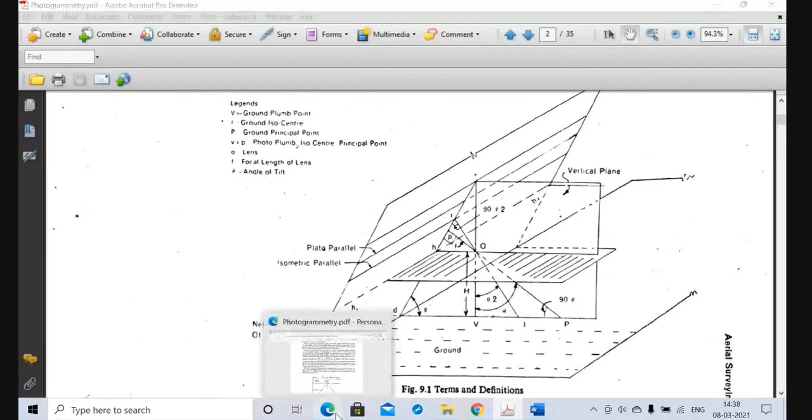The question I ask before every surveying class is: what is your concept about surveying? What is surveying? Prepare an engineering map. Anything else? You are already familiar with conventional methods of surveying, that is chain compass survey, theodolite survey, all already taught to you, right? Sir, surveying is the way to determine objects on a map for making the structure. Okay.

I think your batch has not been able to perform any practical class, right? No, sir. Surveying is purely a practical subject. You have to perform the thing on the field. So unless and until you do so, it will be impossible to grasp the potential and the true nature of the subject. However, all of us are facing these limitations.

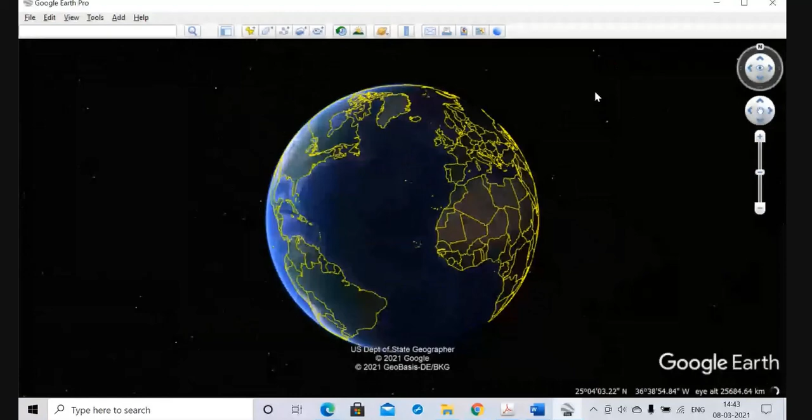So to draw anything on space, say a line. What is this boundary of India constituted of on the map? Of course, a line or combination of lines. And to draw any line, what do we require? Length of the line. The coordinates of the line. Coordinates of the line, what does it mean? Call it a point. Which points we connect to draw a line.

Could you see the map of India on your screen, the Google Earth map? Yes, sir. Fine. These yellow lines are constituted by joining several straight or curved lines. To draw any line, we need to ascertain the points constituting the line. So basically, we are scaling down our whole discussion to ascertaining the position of points on some spatial coordinates. Right? That is the basic principle of surveying.

Somebody has mentioned that for preparing maps, relative positions of different points on different planes are required. Of course, it is required. And whatever surveying you have learned so far, the conventional methods like chain compass, theodolite, leveling, in all of these you have basically learned how to ascertain, measure, and represent relative positions of different points on a particular plane.

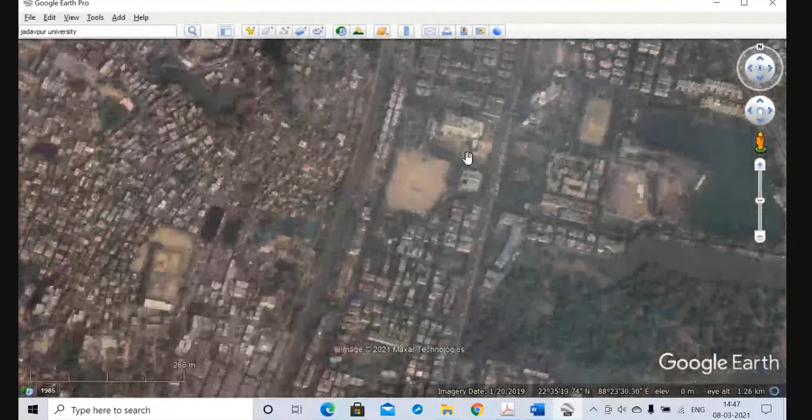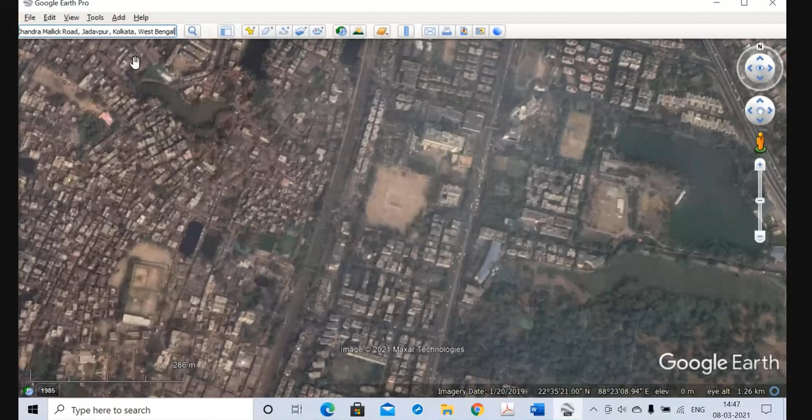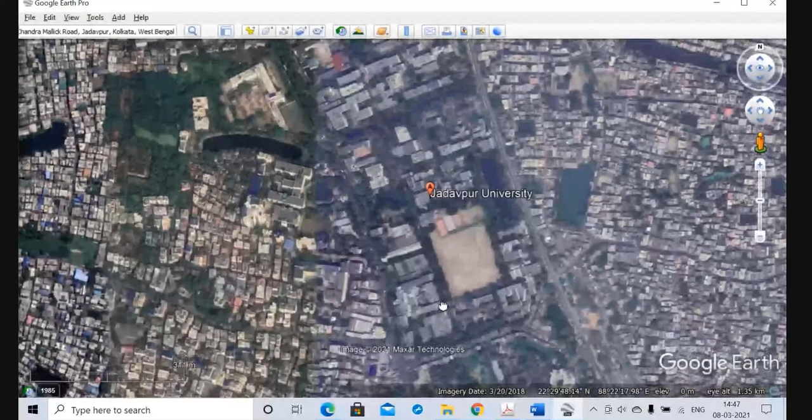the entire map of the entire area, just a second. So the map of the entire area is now visible, and this particular building is our very own Projukti Bhavan, hosting the civil engineering department.

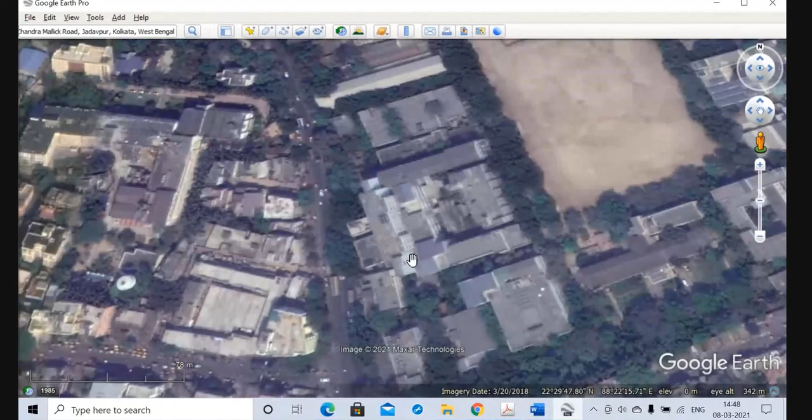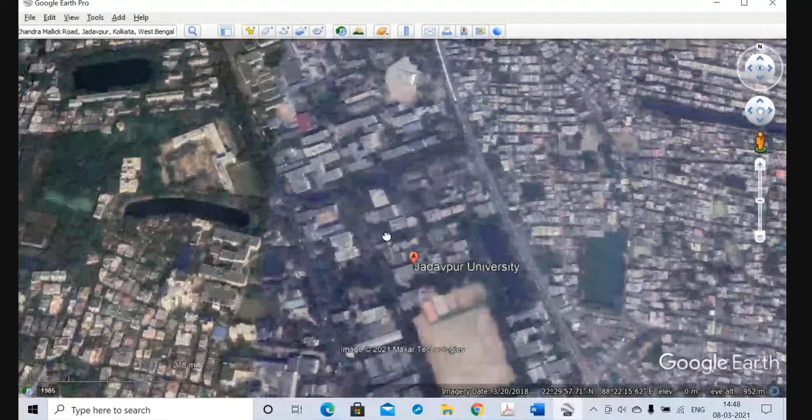So we could take all kinds of measurements here itself and see in a top view how the entire area looks like. It does not require any of the conventional methods to prepare this particular image. This particular image is made up of combining several images taken from satellites.

So our surveying work, with the advancement of technology, has now come to this extent. Of course, we are not going to study here the satellite imagery. Perhaps GNV sir is going to teach you the remote sensing and GIS part. What I am going to teach you here is the science of this photographic survey.

That means when the surveying work is carried out by taking photographs of an area either from ground or from air. So our area of study will be photographic survey or aerial survey. Mind it, this satellite imagery definitely is a part of, a more advanced part of this photographic survey.

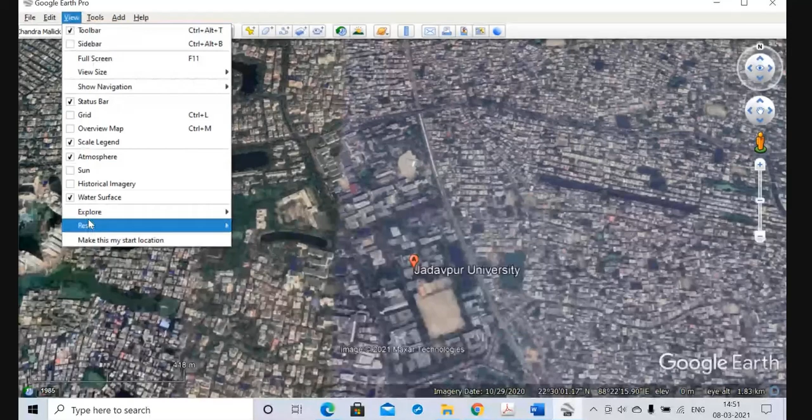After adjusting the tilt of the photograph, the kind of photograph we are seeing here is a vertical photograph. What is a vertical photograph? When the plane of the photograph or plane of the sensor of the camera is exactly parallel to the plane of the surface for which we are taking the photograph. So this is a vertical photograph. There could be other kind of photographs also.

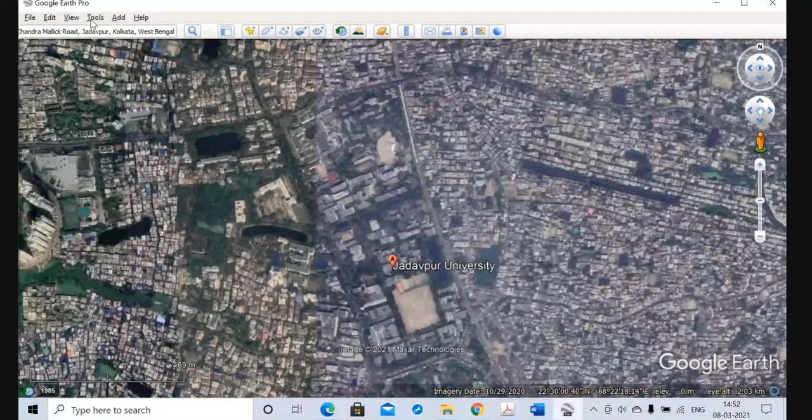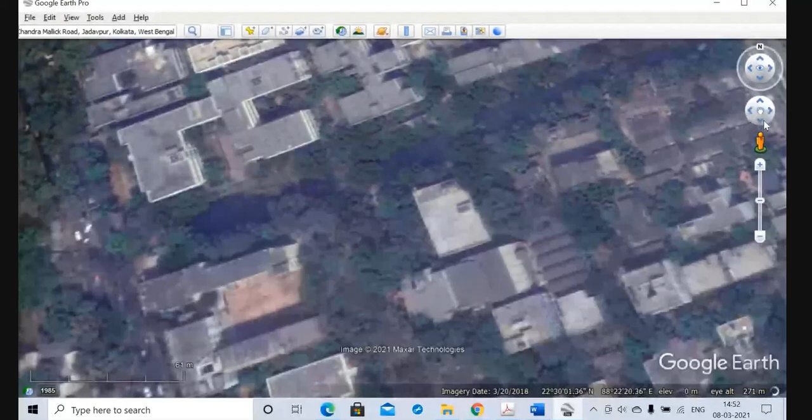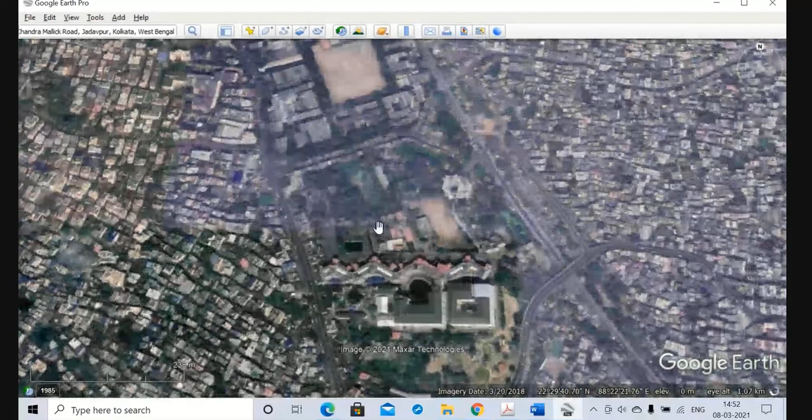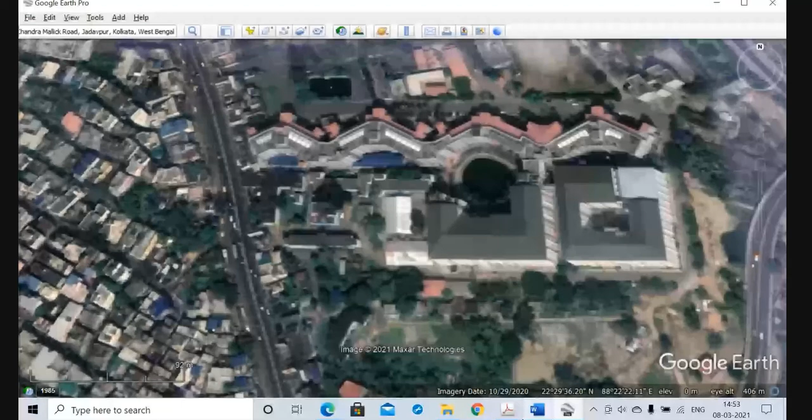Just a second. As you can see here, walls of these buildings are visible, right? Had it been a purely vertical photograph, we could have only seen the rooftops or the footprints. So the photographs we are seeing here might not be purely vertical ones. This kind of photographs are called oblique photographs.

I am taking two images and sending them to your WhatsApp group. Just see it. This is my tabletop. Just a second. Could you see the photograph sent to your WhatsApp group? Yes, sir. You have to keep your WhatsApp on.

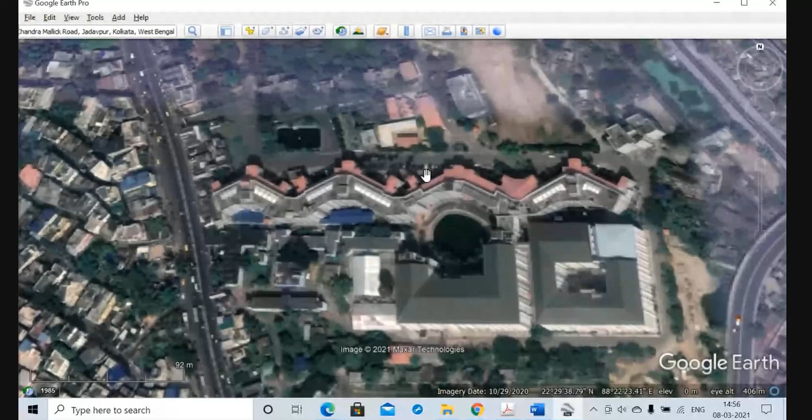Depending on the inclination, the oblique photograph again could be of two kinds. If we just simply imagine, all these photographs that are visible on the screen are called low oblique photographs. These are called low oblique photographs when the horizon is not visible. I am taking a third photo of the same pen.

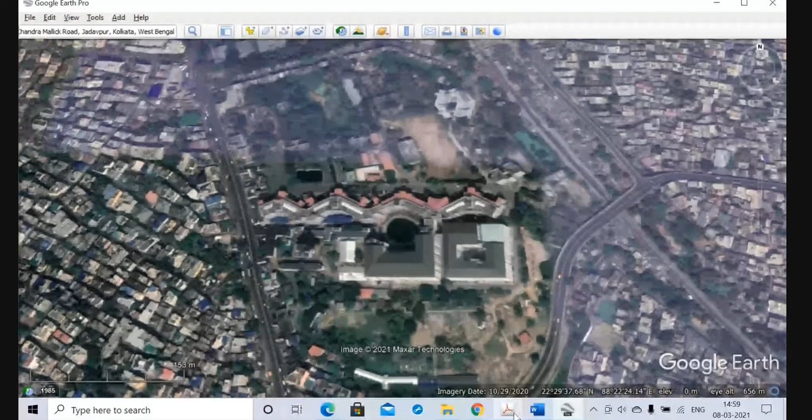In our course of study, basically we are going to study two kinds of photographs. That is either vertical one, the very first one, or the low oblique photographs with less inclination. Okay. So, with this brief introduction, let us get acquainted with a few terminologies.

Unfortunately, the blackboard is not available. So this is my limitation here. Limitation to you also. So you have to imagine a bit.

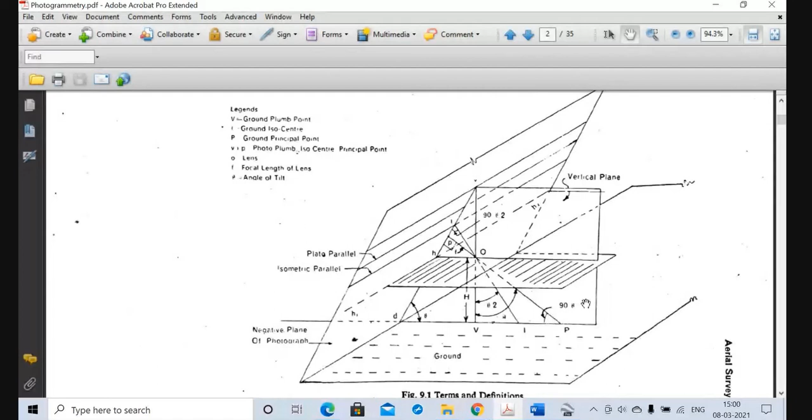This is the representation of an oblique photograph. Let us try what is what. As you can see, this dotted plane is the horizontal plane. Let us consider it as ground. The inclined plane, this one, is the plane of the photographic plate.

Is the figure clear up to this? Yes. This plane is, just follow the cursor. This plane is horizontal plane, and this is the inclined plane of the photographic plate. When extended, these two planes are meeting at this particular line. And as you can see, the plane of the photographic plate is inclined to the ground plane by an angle theta.

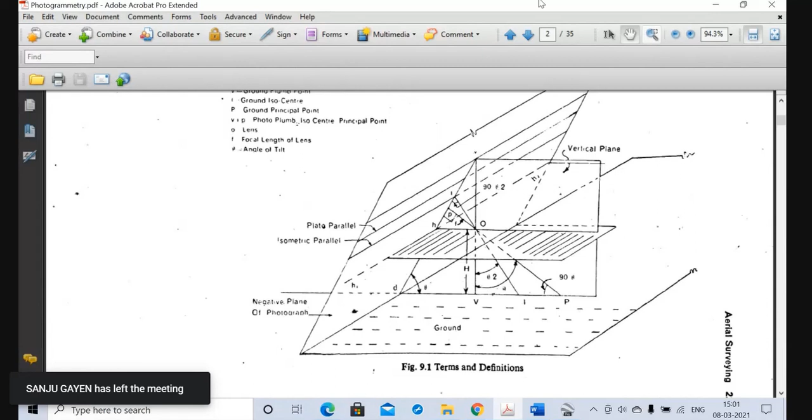Now, there is a point in this three-dimensional space enclosed between this ground plane and the inclined photographic plate, denoted as point O. This point O represents the optical center of the camera lens with which the photograph is being taken. Is it clear up to this point? Yes, sir. The construction of the figure is very important. You have to understand it.

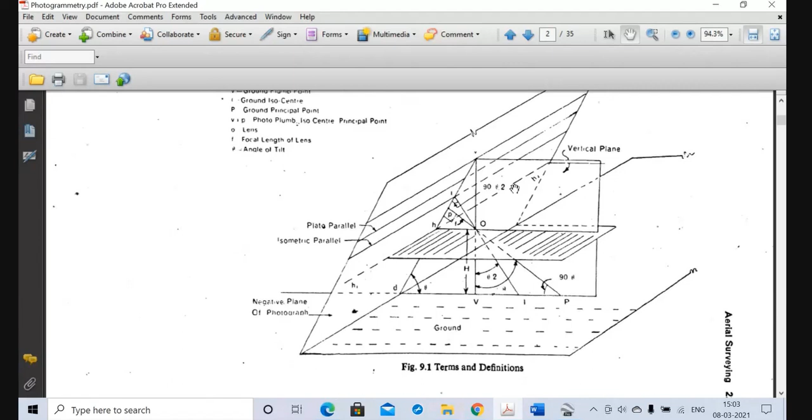Okay. Now, we have drawn another plane parallel to the ground plane. This is the ground plane. We have drawn another plane parallel to the ground plane, passing through point O, which intersects the photographic plate at a line H1 H2. This is H1, this is H2. Is it clear up to this point? Sir, can you repeat once? Yes. Okay. I'm just opening the camera.

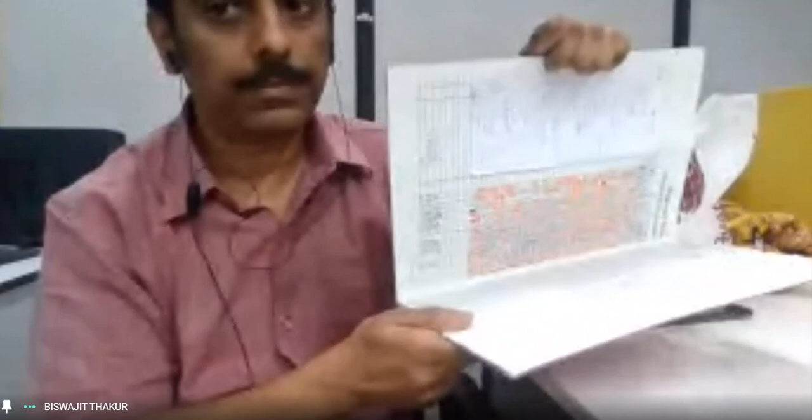Could all of you see this attendance register I am holding? Yes, sir. Imagine this particular plane as the ground plane, and this inclined plane as the photographic plane. Okay? Okay, sir. Fine. Just see the position of my fingertip. Somewhere here is the optical center of the lens.

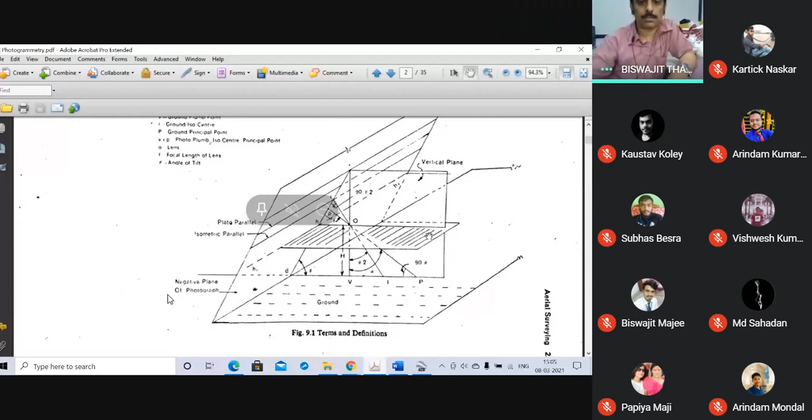Through it, I am drawing a plane parallel to the ground plane. So that plane is going to intersect this photographic plate at a line. This is H1 H2. So this is clear. Let us draw a straight line right through point O, that is the optical center of the lens, which is perpendicular to the photographic plate. I am talking about this particular line, OP. OP is going through point O, and it is perpendicular to this inclined plate.

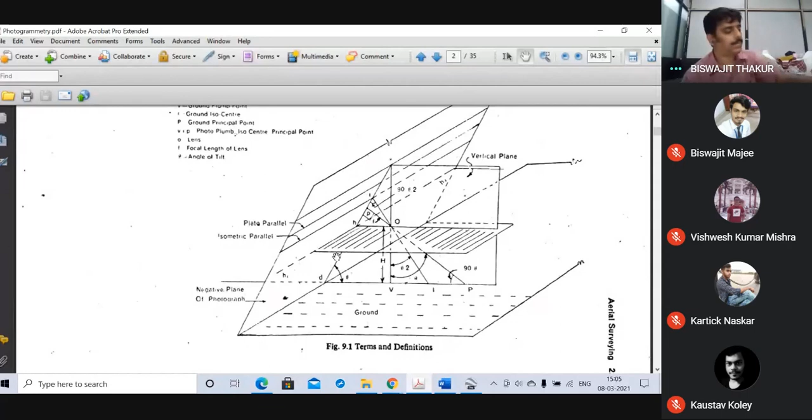Again, just see the camera. This line, the pen. It is OP, perpendicular to this photographic plane. Sir, can you hold the camera a bit low? It is high. Now visible? Yes, sir. My fingertip is point O. The pen is passing through that point and is perpendicular to this inclined plane. Okay? This line is called the photo principal line.

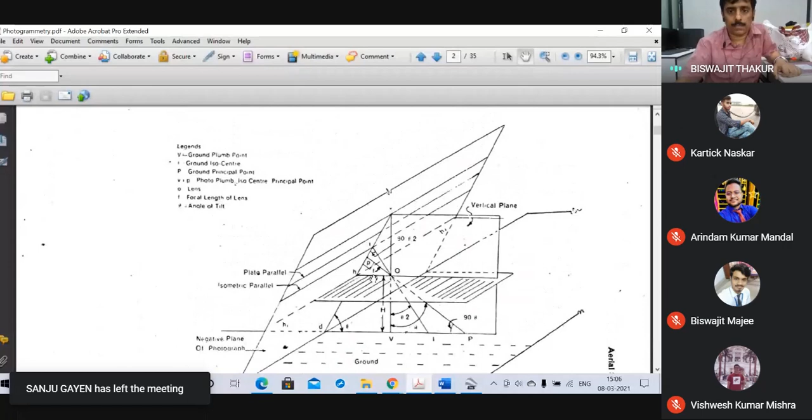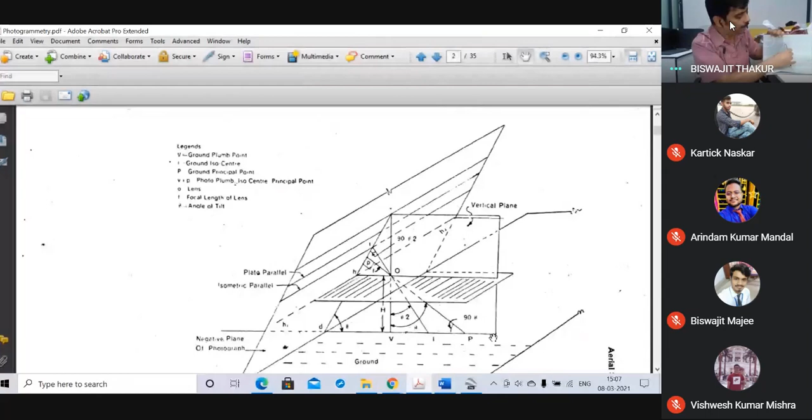This line is called the photo principal line, and it is cutting the photographic plate at a point denoted by small letter p, and when extended, it is cutting the ground at a point denoted by capital letter P. Again, just think of something like this. Could you see the pen? Yes, sir. This is optical center O. This is our photo principal line. That line is cutting the photographic plate here and the ground plane here.

These two points are called principal points of the photograph. On ground, it is called ground principal point. On photograph, it is called photo principal point. And together they are called conjugate principal points. We will learn about several such conjugate points. Generally, the points on the ground plane are denoted by capital letters, and corresponding points on the photographic plate are denoted by small letters. So now we know this is the photo principal point, small letter p, and this is the ground principal point.

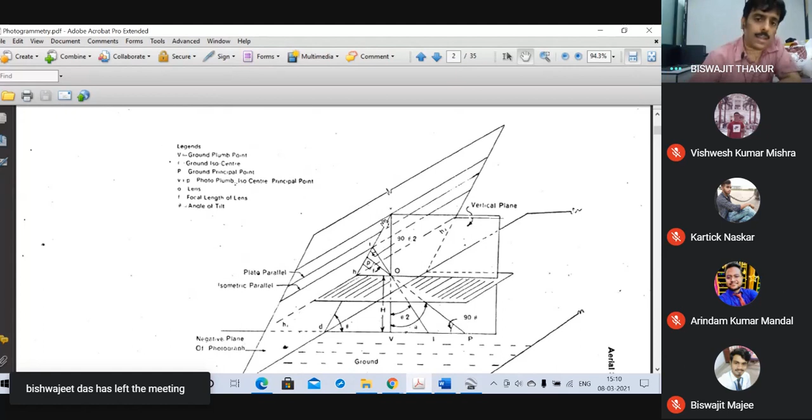This particular line is called the plumb line of the photograph. And again, it is cutting the photographic plate at small letter v point and the ground plane at capital letter V point. This line is called the plumb line, and these 2 points are called the plumb points. Of course, the small letter v point is called the photo plumb point, and the capital letter V is called the ground plumb point.

Up to this, is it understood? Is it clear? Yes, sir. Yes, sir.

Now I am on the third pair of conjugate points, which is very, very important. As you can see, the principal line and the plumb line again are inclined to one another, making an angle theta in between them. The same angle of inclination. I need not explain this. Angle of inclination of this plate with the horizontal will be same as the angle of inclination of the line to the photographic plate with the vertical one. So if this angle is theta, then this angle will also be theta. Understood?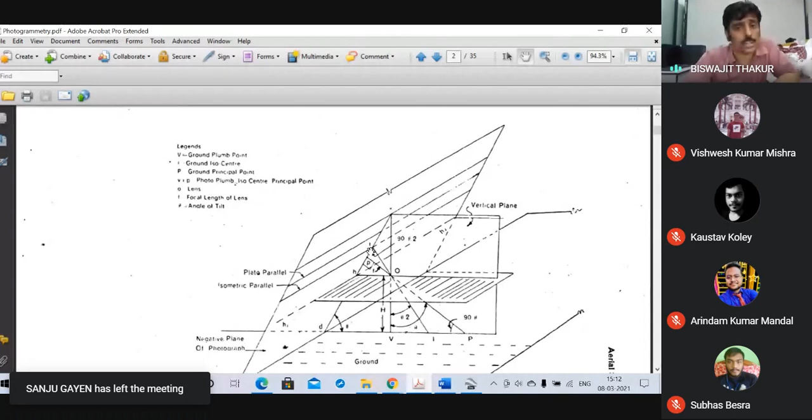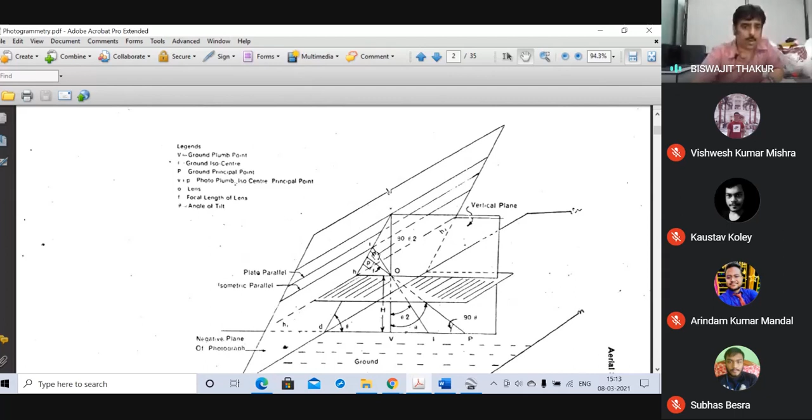Now I am drawing a line bisecting this angle theta through point O. This line is going to cut the plane of the photograph at this point, denoted as small letter i, and the ground point here, denoted as capital letter I. These 2 points are again a pair of conjugate points and are called isocenters. Of course, this point is called photo isocenter and this point is called ground isocenter.

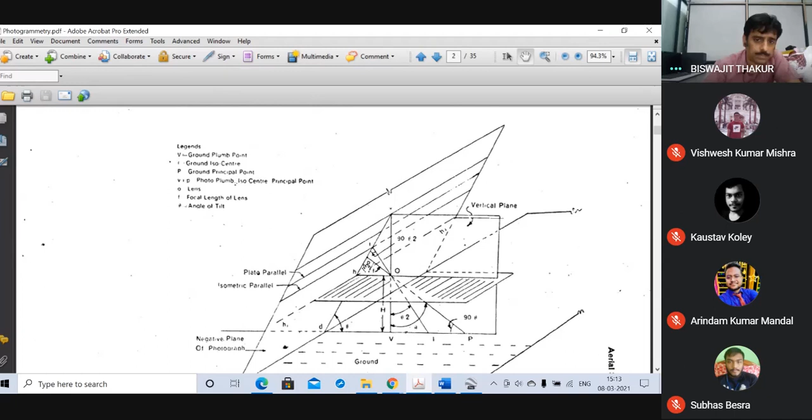What is the typicality of this particular point? As you can see from our simple trigonometric knowledge, just follow my cursor. If this angle is theta, then this angle is also theta. Isn't it? Yes, sir. If this angle is theta, then this angle is going to be 90 minus theta.

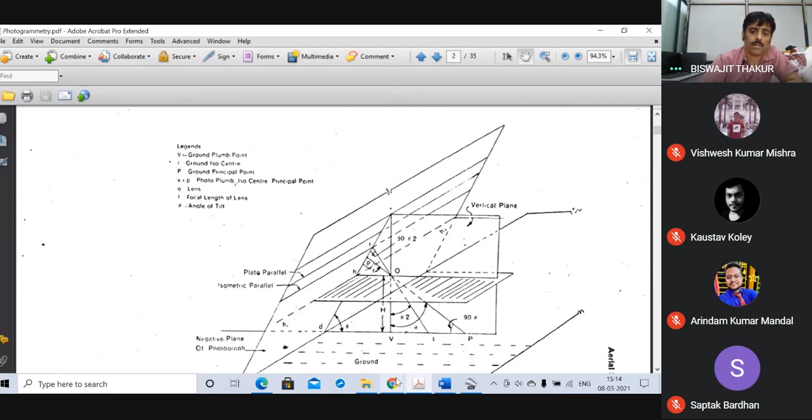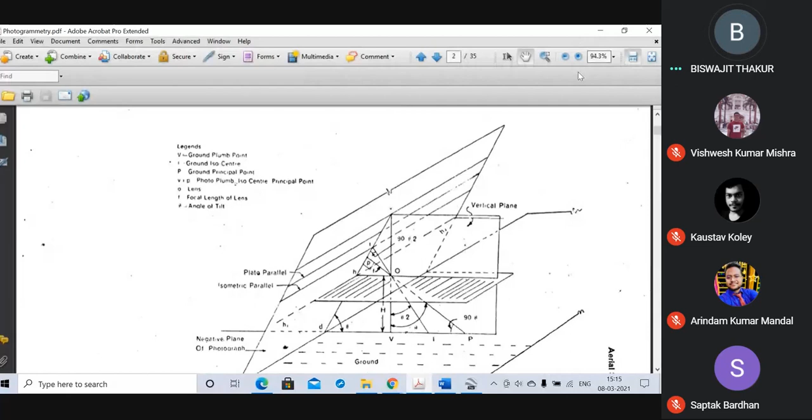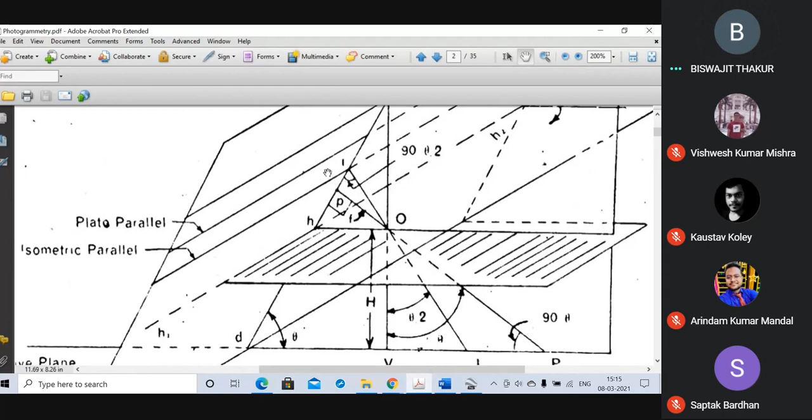We have already said that this particular line is bisecting this angle theta. So each of these 2 angles is theta by 2. This angle is theta by 2 and this angle is theta by 2. And the angle concurrent to this angle is again theta by 2. The principal line being perpendicular to this plane, this angle is 90 degree. And if this angle is theta by 2, this angle being 90 degree, this angle is going to be 90 minus theta by 2. Right? Yes, sir.

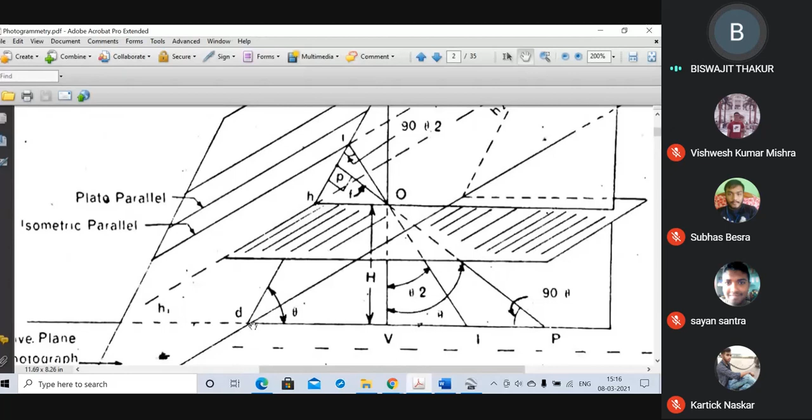Now consider this particular triangle, OVI. For this particular triangle also, this angle is theta by 2. This angle is 90 degree. So this angle will be 90 minus theta by 2. So for this triangle, small i, D, capital I, both of these angles have the same value, 90 minus theta by 2. Right? Yes, sir.

So this line joining the isocenters is such a line which is inclined to both the ground and the photographic plate by the same amount. So this particular line is inclined to both the planes by the same amount, 90 minus theta by 2. This is of particular importance.

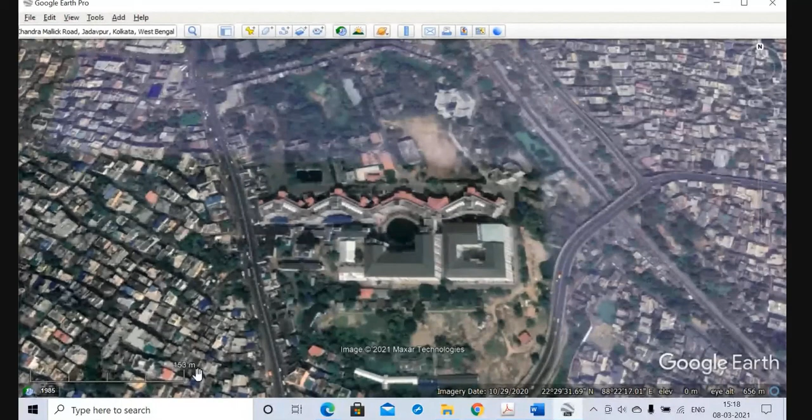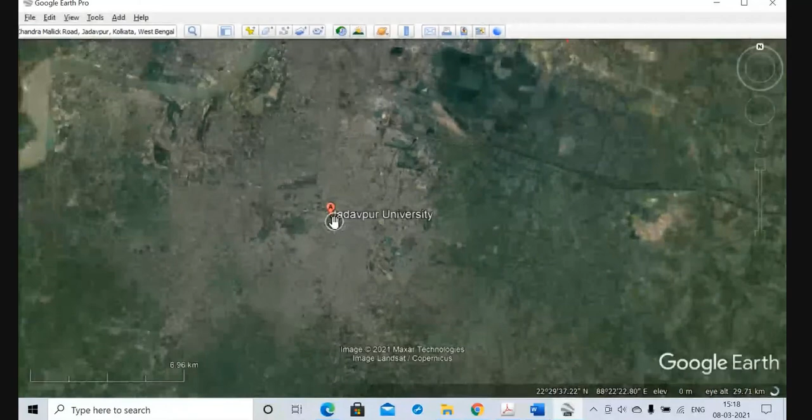See, for all kinds of maps, scale is very important. Unless and until we know the scale of the map, that map is useless for any practical purpose. So we must know the scale of the photograph also. See in this Google map, could you see this bar? Yes, sir. This represents the scale. So this much length is representing 153 meter on ground. See, the scale is changing as I am zooming out. The same length is representing more and more distance. And as I am zooming in, it is representing lesser and lesser values. So we have to know the scale.

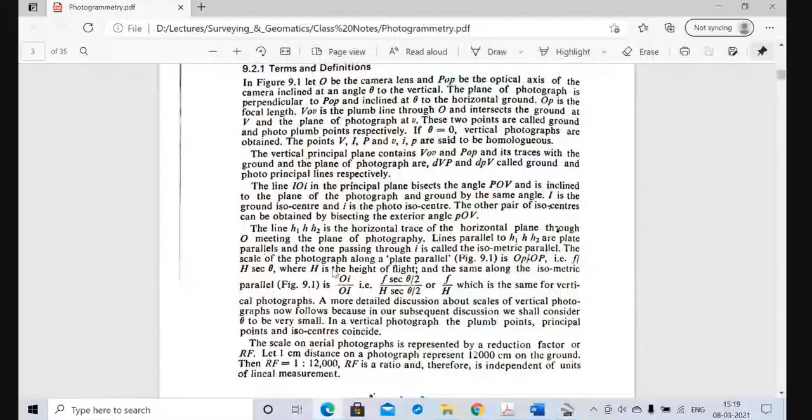How to find out the scale of a photograph? Let us take a typical vertical photograph, unlike the one we are considering right now, which is an inclined photograph. In a typical vertical photograph, the photographic plate is absolutely parallel to the ground surface. We are taking a photo of an area enclosed between these 2 points A and A dash on the ground. By simple optics, simple geometry, the same area is represented on the photograph as small a a dash. And what will be the scale? It will be small a a dash divided by capital A A dash. Right?

Yes, sir. Yes, sir. Fine.

Now, from the properties of similar triangles, as you can understand, both these triangles, the upper one and the lower one, are similar to one another. What is the most important property of similar triangles? Ratio of the similar sides are equal, right?

So let us consider these two triangles: capital O, capital A, capital V, the bottom one, and capital O, small a, small v. These two triangles are also similar. So basically, for determining the scale, we are going to find out the ratio of these two similar sides, small AV divided by capital AV, but that is equal to capital O small v divided by capital O capital V.

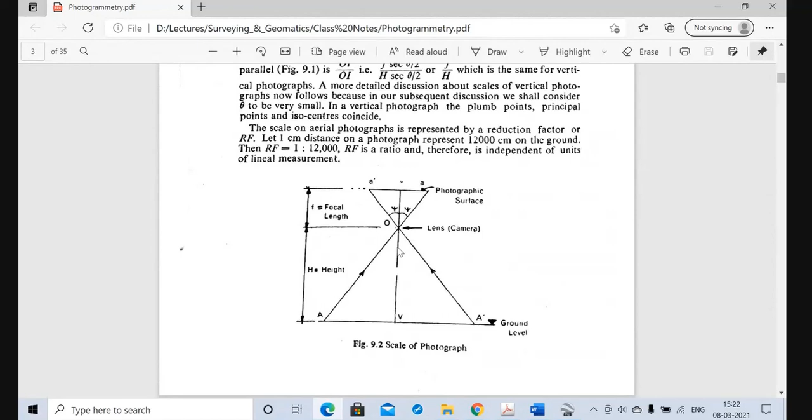What will happen for an inclined photograph like this?

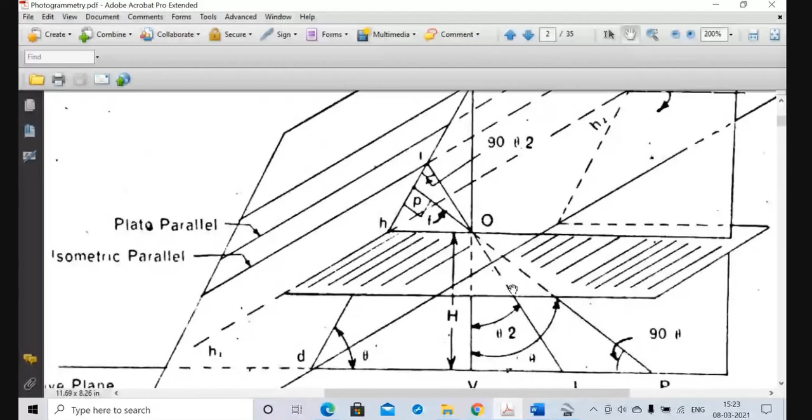Here, the scale of the photograph will be capital O small p divided by capital O capital P. How much is capital O small p? This is the perpendicular distance to the photographic plate, so this is the focal length. And this capital O capital P, how much is this? If this angle is theta, then the cos component of OP will be H. So OP cos theta will be H, or OP is H sec theta.

So the scale of this inclined photograph will be small OP divided by capital OP, that is F divided by H sec theta, right? Up to this, is it clear? Yes, sir. Then we have two clear distinctions. For vertical photograph, the scale is represented as F divided by H. For inclined, oblique photographs, the scale is represented as F divided by H sec theta, where theta is the angle of inclination. Right? Yes, sir.

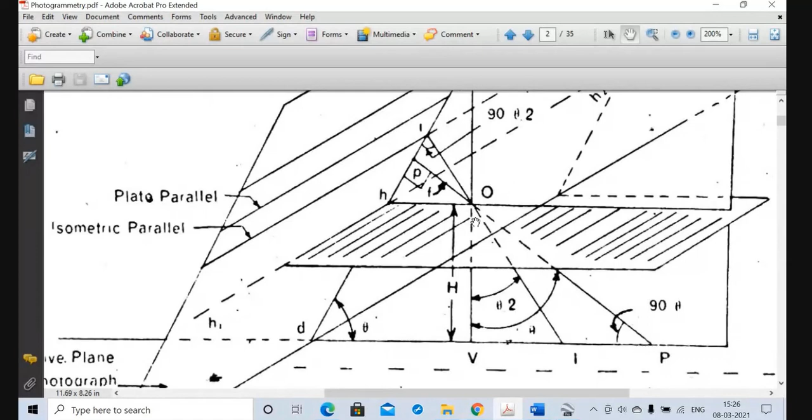Now let us examine what happens when the isocenter is considered. Let us see. The scale along the isocenter: the image of the ground isocenter is formed here, small I. So for this image, the scale of the photograph is O small I divided by O capital I, right? Yes, sir. Fine.

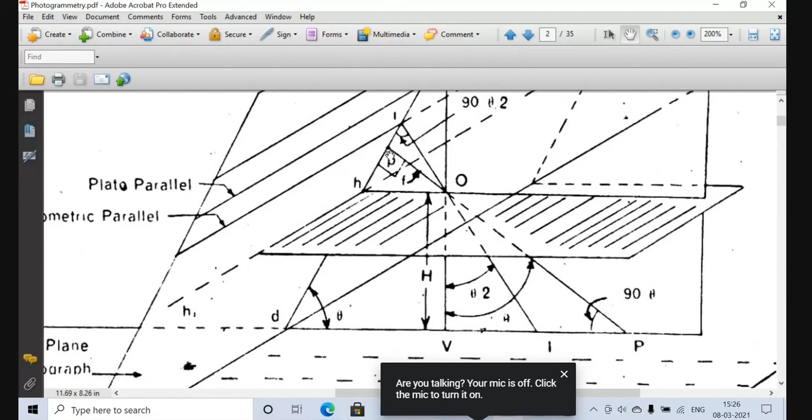Now, O small I is how much? This angle is 90 minus theta by 2. This angle is 90, so this angle is theta by 2. So OI cos theta by 2 is OP, or OI is equal to OP sec theta by 2, but OP is the focal length. So OI is F sec theta by 2.

Now consider the capital I. How much is it? This angle is again theta by 2. So OI cos theta by 2 is capital H, or OI is equal to H sec theta by 2. So O small I is F sec theta by 2, O capital I is H sec theta by 2. So scale along this isocentral line is F sec theta by 2 over H sec theta by 2. Sec theta by 2 cancels out, and the scale becomes F divided by H.

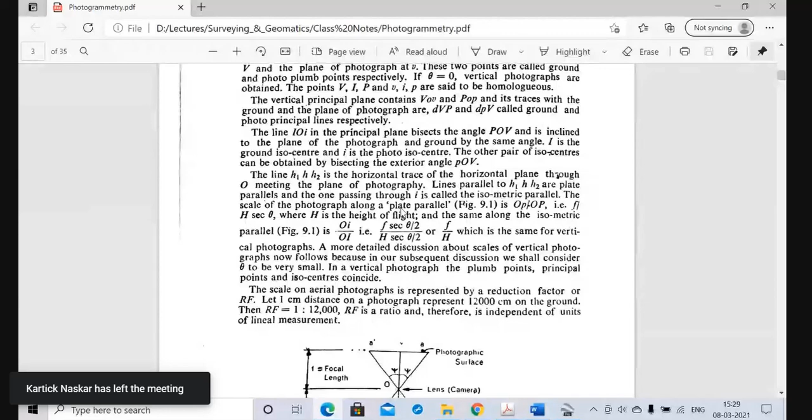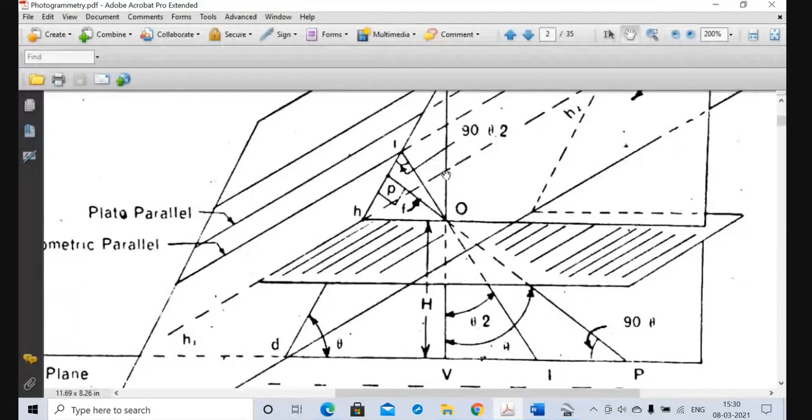We are going to conclude today's discussion saying the last thing, that is, for a vertical photograph, 3 pairs of conjugate points coincide with one another. You cannot differentiate between them: plumb point, isocenter, and principal point. For a vertical photograph, these 3 points become one single point. So that is the typicality of a vertical photograph.